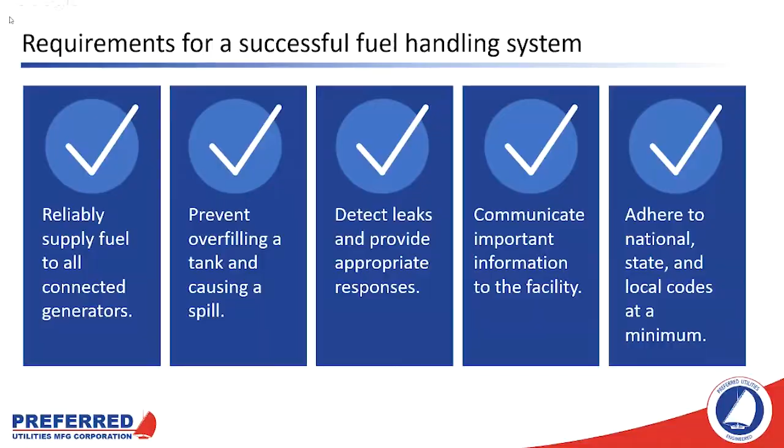So before we start designing the fuel system, we need to know what we're up against. We need to find out, are the main tanks above ground or underground? What is the configuration of the main tanks? Are they horizontal, vertical, cylindrical, rectangular? Do the tanks need to be UL 142 or UL 2085 fire rated? And finally, what size are the main tanks?

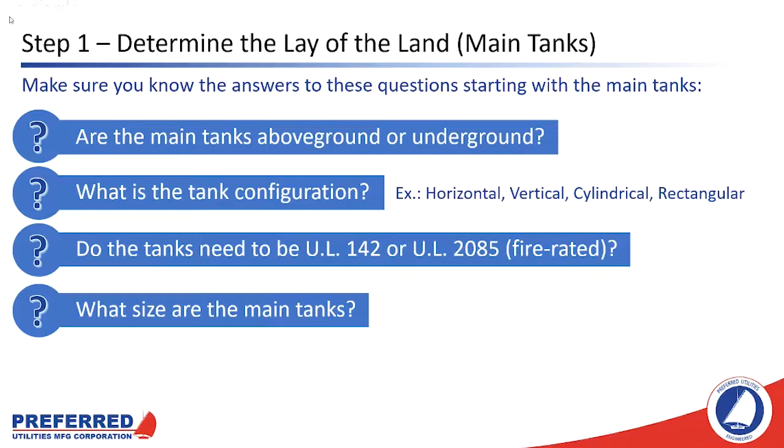This is a picture of a cylindrical underground storage tank. Underground storage tanks, or USTs, can hold a lot of fuel, more than an above ground tank. They don't take up any real estate because you can put parking spaces on top of them. Installation requires special licenses, so they're more involved to install. More agencies claim jurisdiction over underground tanks. I have a customer in Austin, Texas, and 4 different agencies claim they have jurisdiction over his underground tank. Preferred doesn't manufacture main tanks, but we can include them in our projects, and when we do, we'll make sure the main tank is coordinated with the rest of the fuel supply system.

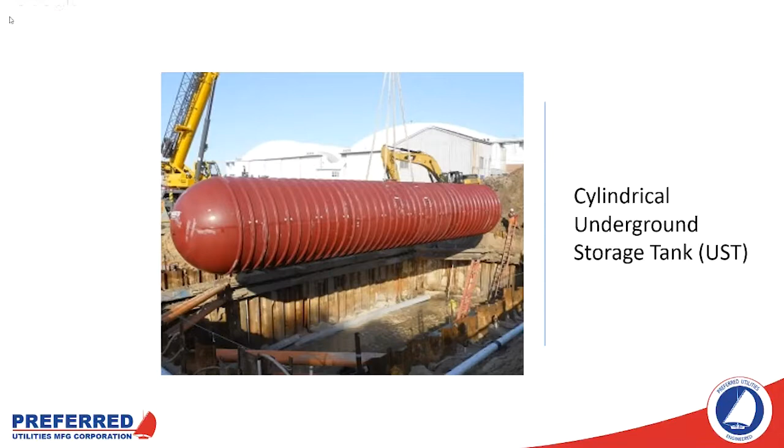Here's a picture of a rectangular above ground storage tank. Rectangular above ground tanks are easier and cheaper to install. Leak detection and virtually everything else is easier with an above ground tank than with an underground tank. They take up space and they're ugly, so architects usually favor underground tanks over above ground tanks. For most mechanical engineers, the choice of tanks has already been made by the time we get the project. It's usually the architects that are deciding where the tanks are going to go based on available space, and we have to live with their decisions.

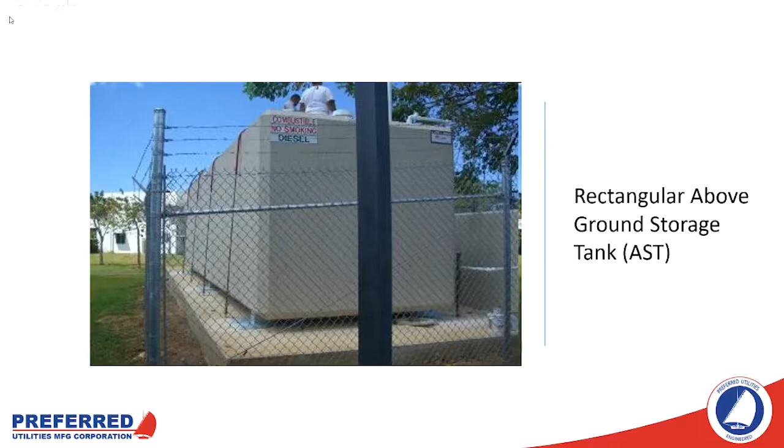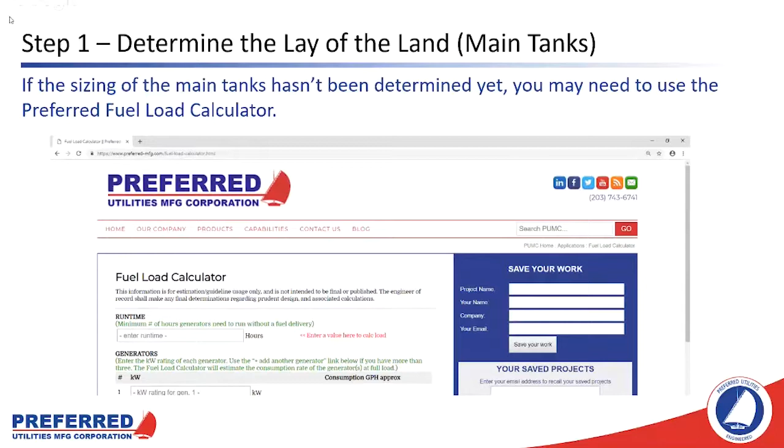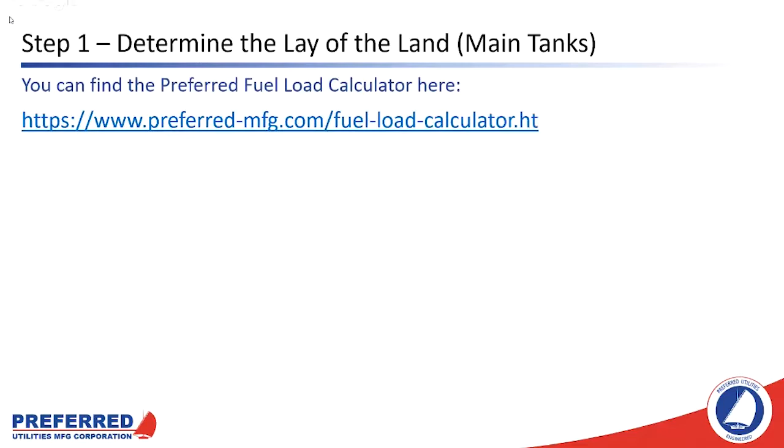If the size of the main tanks hasn't been determined yet, you may need to use the preferred fuel load calculator. In the fuel load calculator, you input your generator sizes, the required run hours, a couple of things like ullage and drop tube gap, and it'll calculate how many gallons of main tank storage you need. Florida recently passed a law that said nursing homes have to have 120 hours of fuel available to their generators, so this is getting used a lot in Florida. You can find the preferred fuel load calculator at this URL, or just Google preferred fuel load calculator and it'll be our first hit. This little web tool is so easy, it doesn't really require any explanation.

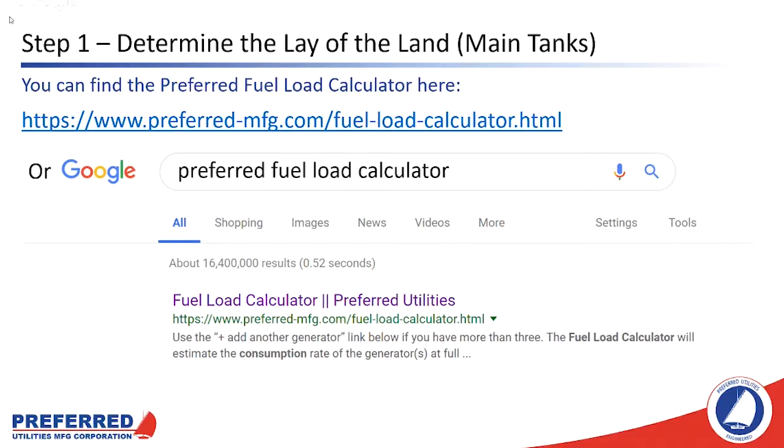So, more things we need to know about the system. Where are the generators located in relation to the main tanks in terms of vertical distance and pipe length? By now, you should know whether the generators are going to be on the ground floor, up a couple of floors, or on the roof. And we should know whether our main tanks are going to be above ground or below ground. We need to know if the generators are going to be supplied with belly tanks or if the fuel system supplier is going to need to provide day tanks. And finally, we're going to need to know the capacity of the generators.

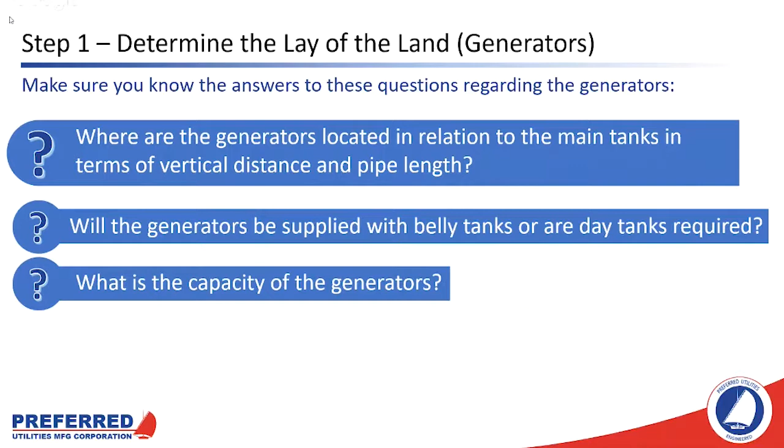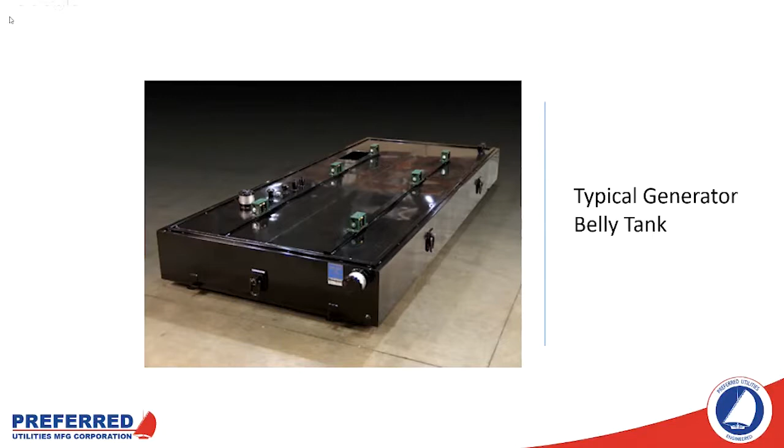Generators and belly tanks are typically sized for 2 to 4 hours of generator runtime, but some authorities having jurisdiction will put additional limits on the amount of fuel you can store in a day tank. Los Angeles, for example, limits day tanks to 60 gallons. So with a large generator, you're obviously not going to get 2 to 4 hours worth of runtime.

So the first step in supply pump sizing is determining the consumption of the generators. There's a real easy rule of thumb to help with this: for every 100 kilowatts of generator capacity, the engine will consume 7 gallons per hour of diesel fuel. In this example, it's an 800 kVA generator, so 800 kilowatts and 56 gallons per hour.

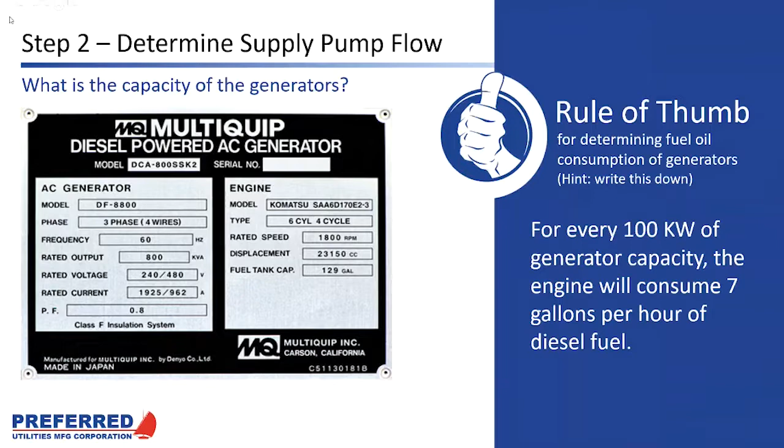So on top of that 56 gallons per hour, we're going to want to apply a generous safety factor, usually 3.0 to 4.0. The idea here is we want the supply pump to come on, quickly top off the day tank, and cycle off again. The pumps for most generator fueling systems are relatively small, so even with a large safety factor like this, it may only bump you up from a 3/4 horsepower to a 1 horsepower pump. It's not a huge increase in pump horsepower, cost, or electrical consumption.

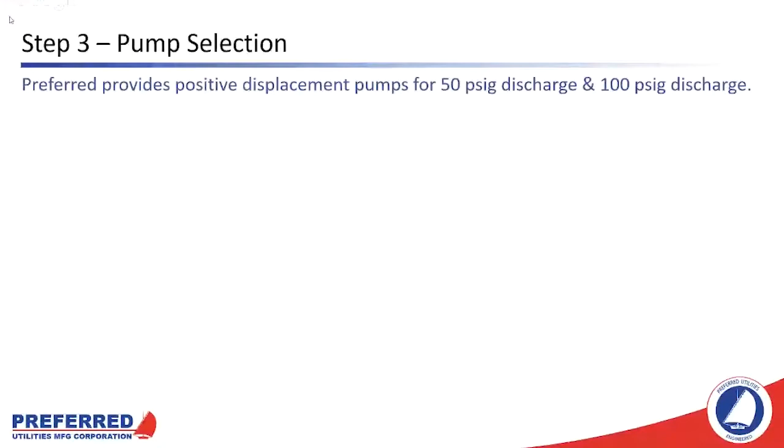Preferred provides positive displacement pumps for 50 psi discharge and 100 psi discharge. This table is from page 38 of Preferred Utilities Catalog 25. This catalog is available online. If you want a hard copy, email me and we'll make sure you get one.

These are the pumps used in Preferred's ATPS and SATPS pump sets. ATPS stands for Automatic Transfer Pump Set, which is the packaging we typically use with generator fueling systems. The SATPS is a semi-automatic transfer pump set. The pumps and piping are the same. The difference is the semi-automatic pump set is usually used for boiler systems, and the controls are much more stripped down compared to the ATPS. But as far as pump sizing, they're exactly the same.

We keep the parts for each of these pump sets in stock, so if we get a rush order, we can usually put together one of these pump sets pretty quickly, in a matter of a couple of weeks.

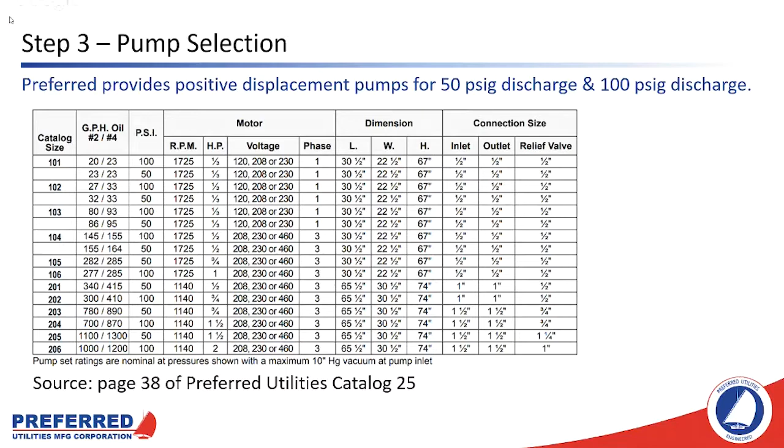If you're not sure what your pump discharge pressure will be, we have a handy web app called the Preferred Pump and Pipe Sizing web app. With this web app, you put in your configuration, whether the tank is below the pump, as in an underground storage tank, or above the pump in an above ground storage tank. You put in your line sizes, your valves, you pick a pump from a drop down menu, and this web app will tell you in real time what your pump discharge pressure is and what your pump suction pressure is.

As long as you're good, those numbers stay in the green. If you get marginal, those numbers will turn orange. And if you get into a situation where the pumps just aren't going to work, this will turn red. There's usually a note down there to give you an idea of what you're doing wrong.

Suction line sizing is critical with positive displacement pumps because they're limited to about 10 inches of vacuum. Discharge pressure is less critical because we have 50 or 100 psi to work with, which is a lot, but it still needs to be checked.

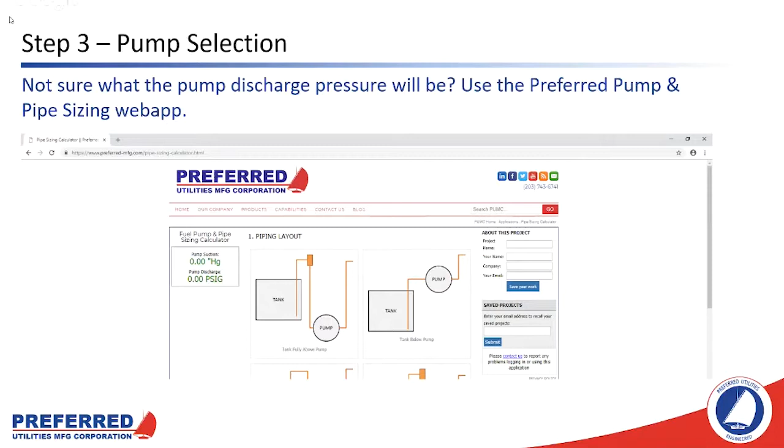You can find the Preferred Pump and Pipe Sizing web app at this URL, or just Google Preferred Sizing Calculator and it should be the first hit.

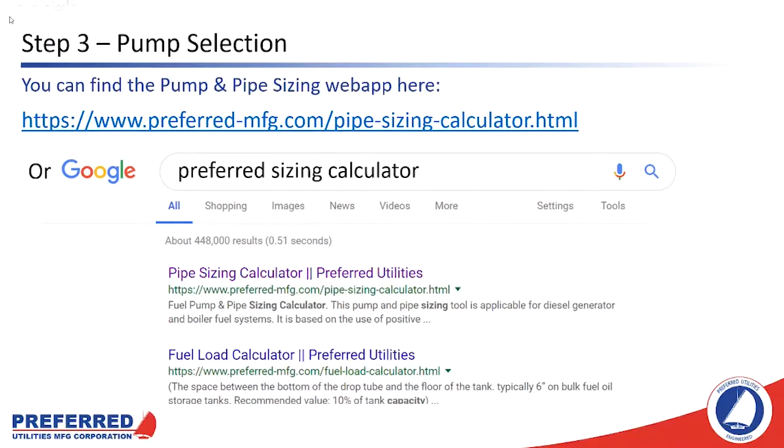In the pump and pipe sizing program, there's a pull-down menu where you select the pump based upon the sizing calculations we did before. Start with a 50 psi pump.

If you are in a situation where the day tanks are a long ways above the pumps, you may find that you need to go to a 100 psi pump.

In a properly designed fuel system, most of your inlet vacuum and discharge pressure will result from vertical lift, the hydrostatic pressure of the oil, not from piping losses. So we need to watch very carefully on underground tank systems, the diameter of the tanks, how deeply buried the tanks are, and then how high above grade level the pumps are going to be mounted, because we're up against a hard limit of about 20 inches of mercury on the suction side.

If you're in a high-rise application and you're certain you haven't undersized any of your piping or valves and your discharge pressure is still above 100 psi, that's probably an application for rotary screw pumps. Contact somebody at Preferred and we'll set you up with information on rotary screw pumps that can go to much higher discharge pressures.

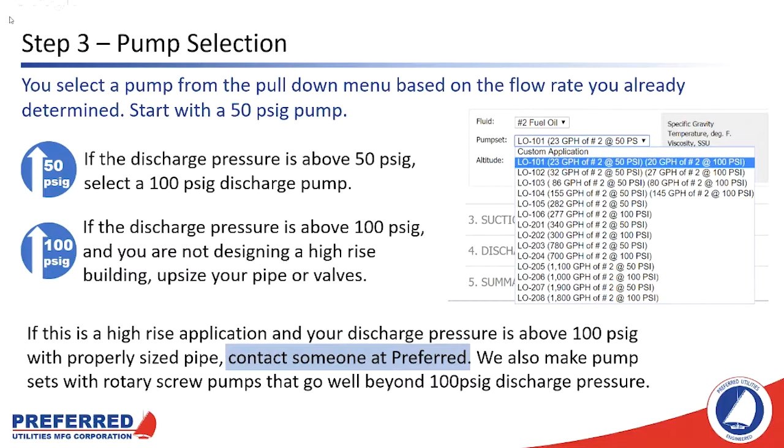There's a lot of text on this page, but it really boils down to a couple of things. We've already determined the flow rate in gallons per hour of our pumps, so we use the pump and pipe sizing program to make sure that our suction conditions are going to work for the positive displacement pumps, and make sure that our discharge conditions aren't going to overcome the maximum output of the pump as well.

Now that you know which pumps are the best selection, you can refer back to this chart for more information about that pump set, including pump RPM, pump horsepower, whether that pump motor is available in single phase or three phase, dimensions, and the connection sizes for that pump set.

This is on the Preferred website, and you'll also find AutoCAD drawings of these pump sets on the website. And if you email us, we can send you SolidWorks models of these pump sets as well.

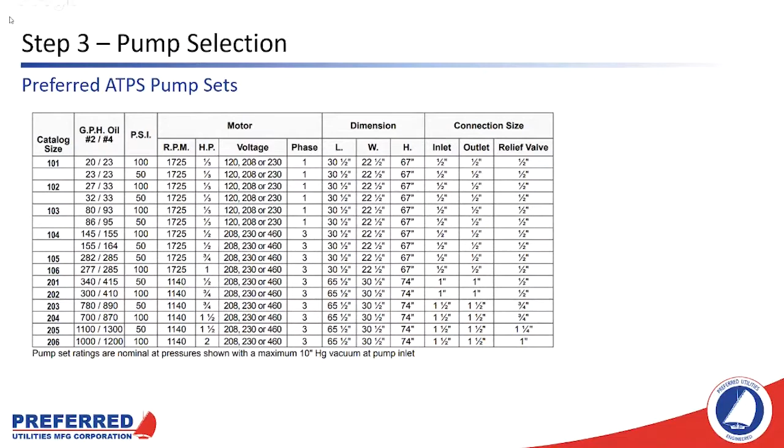For simplicity, we're not showing all the ball valves, pressure gauges, and other piping details that are part of the pump set. Note though, we're showing two Y strainers upstream of the pumps. That's the base model. These pump sets can also be provided with a duplex basket strainer that allows you to dump and clean one basket while you run oil through the other basket. It's a -D behind the part number of each of these pump sets.

There's an important item in the main tank: the foot valve. The foot valve is like a check valve that prevents oil from running backwards through this line and evacuating the oil pipe between the pump set and the foot valve. The number one problem with positive displacement pumps is that they can lose prime if this suction piping isn't done correctly.

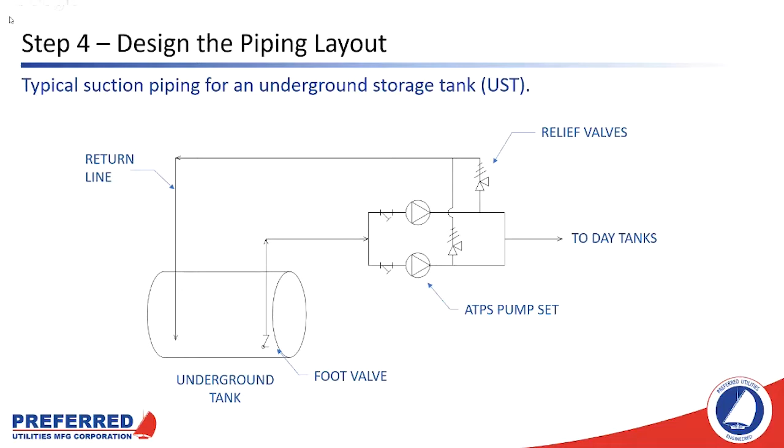Note that we show the supply and return pipes on opposite sides of the tank. This is good practice to keep the tank contents well mixed.

An anti-siphon valve is designed to stop the flow of oil if there is a major leak or a break in the line below the oil level in the main tank. The anti-siphon valve is similar to a spring check valve. The spring is sized so that the pumps can overcome the spring force, open the valve, and allow oil to flow. Siphonic action, or the difference between the hydrostatic pressures of the two columns of oil, will not open the valve, so there is no oil flow.

Anti-siphon valves are often required by local codes, and their CVs are relatively small. So if you're using the pump and pipe sizing program and you keep coming up with a lot of pressure drop in your suction line, you may need to oversize the anti-siphon valve.

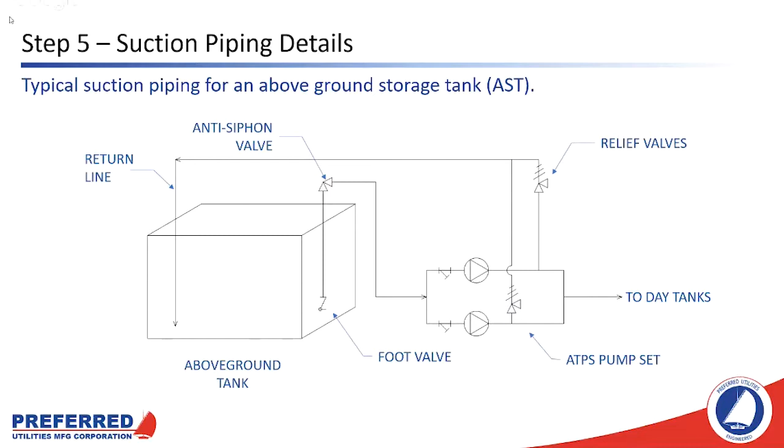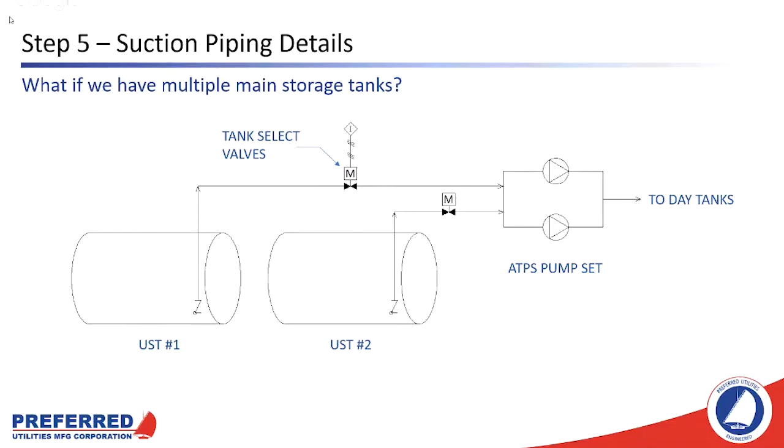Because the most common cause of overfilling a tank and causing a spill is human error, Preferred likes to automate the tank selector valves. The little I in the diamond stands for interlock, meaning the action of that valve is interlocked with the pump controls and the high-level switches in the main tanks.

So moving on to discharge piping. Discharge piping between the pump set and the day tank is very simple if there's just one day tank. The flow switch is there for the pump set lead lag function. If we energize a pump and don't prove flow, we will energize the alarm, shut off the lead pump, and energize the lag pump. If the lag pump doesn't prove flow either, we shut off both pumps and keep the alarm energized.

The controller in the ATPS pump set speaks Modbus, Ethernet, and BACnet, so the facility can know everything the pump set controller knows. Typically, the Modbus address registers that are mapped out to a building automation system include allowing the facility to know when the common alarm is energized, when we detect a leak, and when a pump is running. There's a lot more Modbus addresses than that, but those are the most common ones that are actually used by the building automation system.

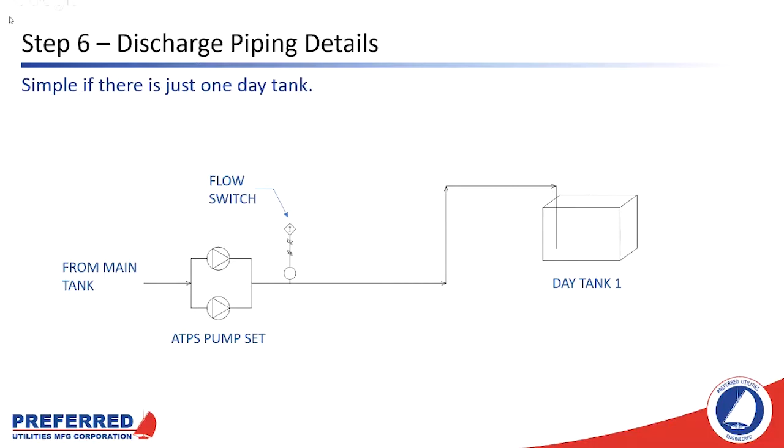If you're going to specify gravity return, ensure the routing of the return line will accommodate gravity return. Horizontal piping must be downward sloping, and there can't be any up and overs in the piping. Typically also, the return line size is one pipe size larger than the supply piping. You always want to be able to take fuel out of the day tank faster than you can put fuel into it.

New York City is now requiring you to provide your sizing calculations for gravity return lines to ensure that they will work. This is a new requirement we just started seeing about a year ago.

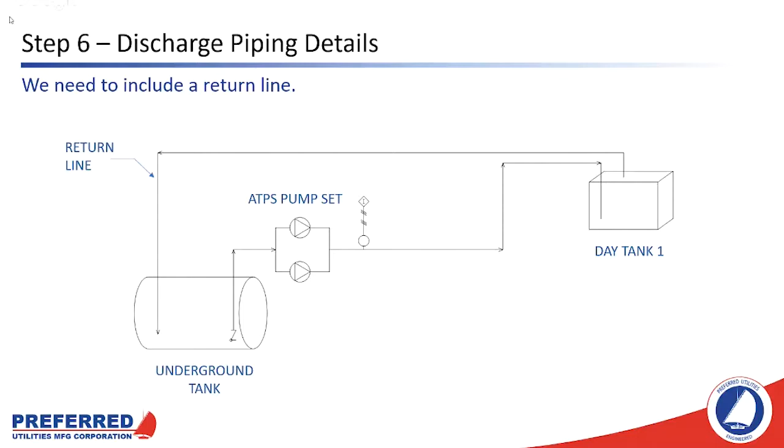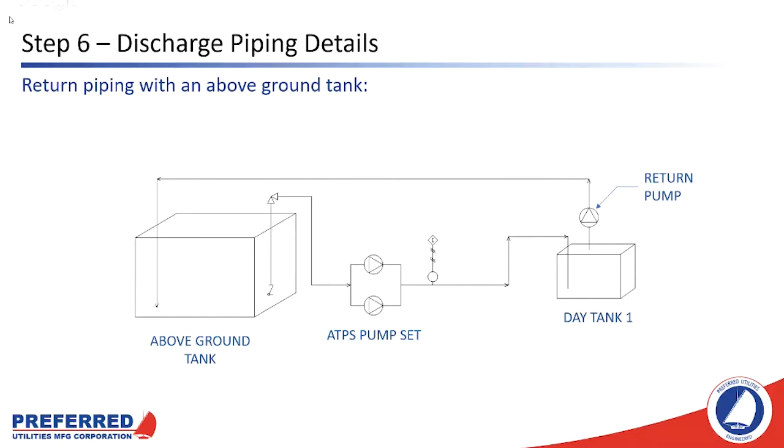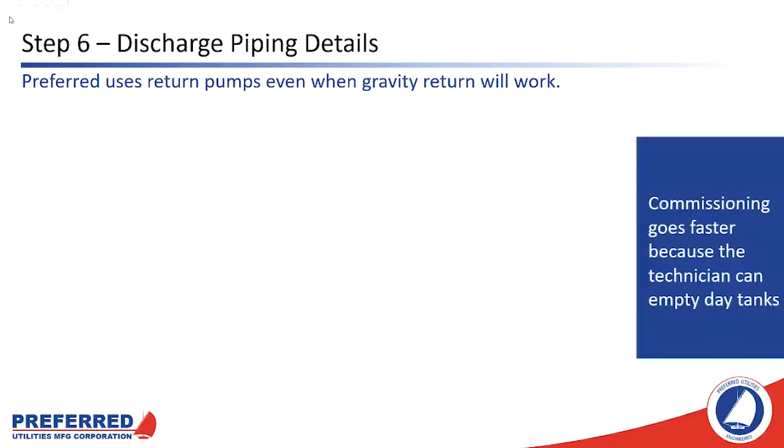Preferred uses return pumps even when gravity return will work for a few important reasons. Commissioning of the system goes faster because the technician can empty day tanks and fill them back up again and prove the operation of the system.

After the system is commissioned and turned over to the owner, the facility's operators can periodically test the fuel supply system by putting a return pump in hand, drawing the oil level down to the pump-on switch, and seeing that the supply pumps come on automatically and top off the day tank. This is a good thing to do weekly, monthly, and definitely if you think you're going to need to run your generators, like you're in Florida and there's a hurricane out in the Gulf.

When combined with main tank filtration, we'll often supply return pumps so that all the fuel in the system can be polished. Preferred filtration systems typically will pull out of the main tank and return to the main tank, but that doesn't clean up the fuel in the day tanks, and it's the day tank fuel that the engine's going to see first. So we'll often combine the operation of the filtration system with the operation of the pump set so that we can pull the oil out of the day tanks, make sure it gets cleaned, and then put it back into the day tanks with clean, polished oil.

And then finally, in hot climates, we'll sometimes use a return pump to do what we call level bouncing. The diesel engine uses the fuel for cooling, so the fuel that comes back to the day tanks is hot.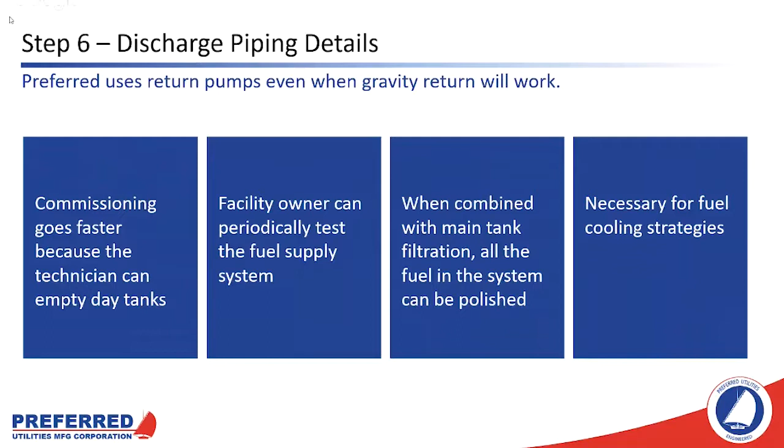Multiple day tanks are piped in parallel, just like multiple main tanks are piped. The supply pipe common to all the day tanks is called the supply header. The supply header can support virtually any number of day tanks.

The largest system that Preferred has done included 11 main tanks piped in parallel, and as of now, 28 generators all piped in parallel. That system had duplex supply headers and duplex return headers so there was no single point of failure that would keep fuel from getting to the engines.

When we have multiple day tanks in a system, we need to include fill valves so that only the day tank calling for fuel actually gets fuel.

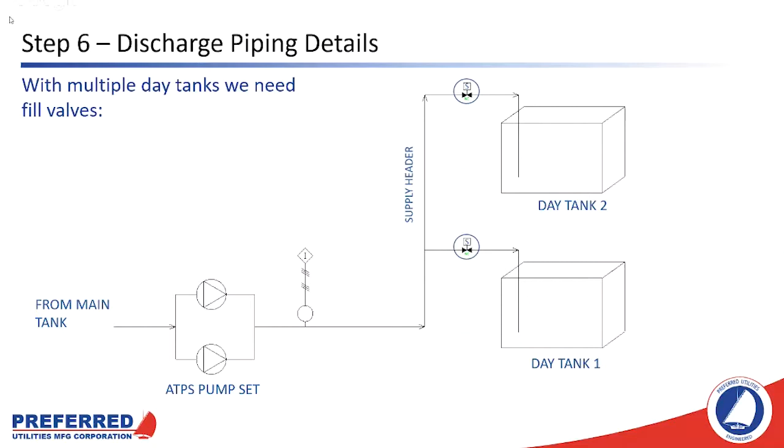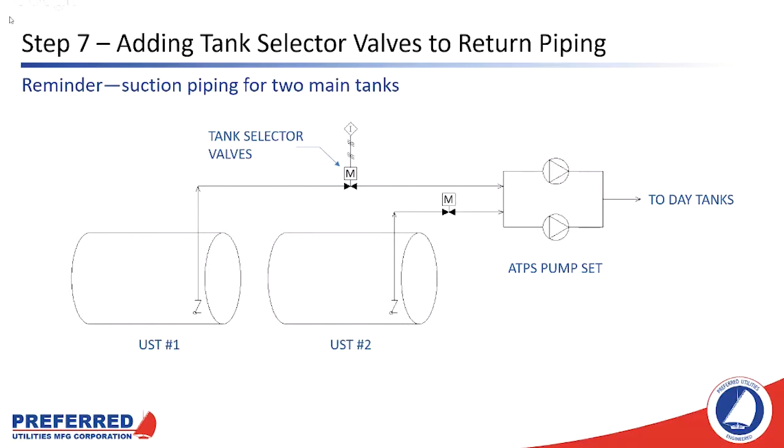Going back a couple of slides, this was our suction piping diagram for two main tanks. When we add return piping to the system, it gets quite a bit more complicated.

The return piping is headered just like the supply header, so that in theory any day tank can pull from any main tank. Some customers specify that flexibility. Other customers will only return to the tank they're drawing from. This is a safer alternative, because when you pull from one tank and return to another, you introduce the possibility of overfilling that tank.

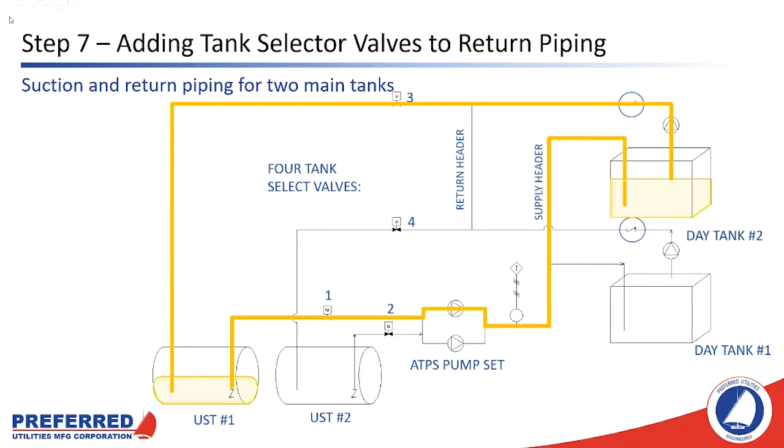If your customer is okay with drawing from one tank and returning to the same tank, we can simplify the piping quite a bit using a Preferred tank selector valve. They're shown here in both threaded and flanged versions. These are 6-port valves that include a common, a normally open, and a normally closed port for both the supply and return lines, so you never have to worry about your valves being lined up.

They're available with lever operators, as shown in these pictures, and we can also supply them with motorized valve operators with proof of open and proof of closure limit switches, if you want to automate this function.

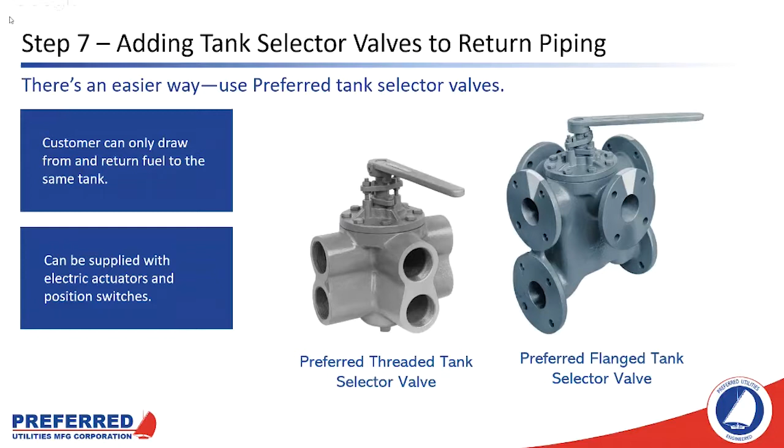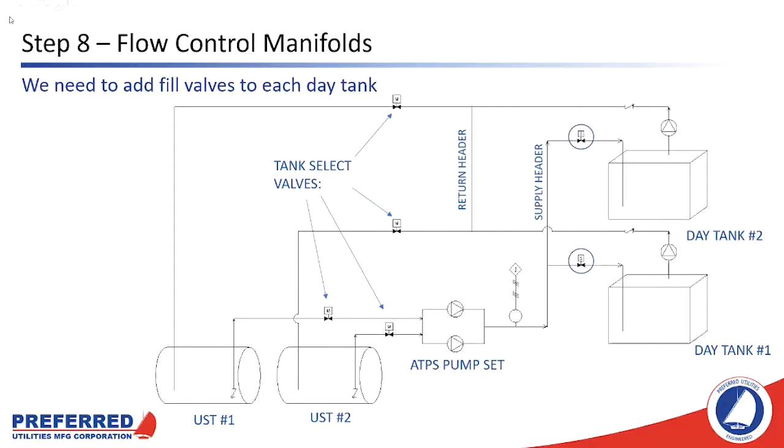Getting back to the fill valves, it's never as simple as what we've shown you already. In real life, the fill valve is part of a larger flow control manifold. The most basic flow control manifold consists of a solenoid shutoff valve with a 3-valve bypass around it. The 3-valve bypass allows operators to isolate a day tank, isolate the fill valve for maintenance or replacement, or bypass the fill valve to automatically fill a day tank.

Excuse me, you can bypass the automatic valve to manually fill a day tank. When Preferred does these systems, we interlock the supply pumps with the high level switches in the day tanks so that even when a facility operator has bypassed the fill valve, they cannot overfill the day tank.

There's a reason for everything we do at Preferred with these fuel handling systems. It's like my first marching band parent meeting before a big overnight bus trip. The band director told us some of these rules I'm going to go over are going to sound bizarre, but believe me, there's a reason for every one of them. Coming from a boiler background and now working on these fuel handling systems, I've found the Preferred engineers don't do anything by accident. There's a reason for everything they do.

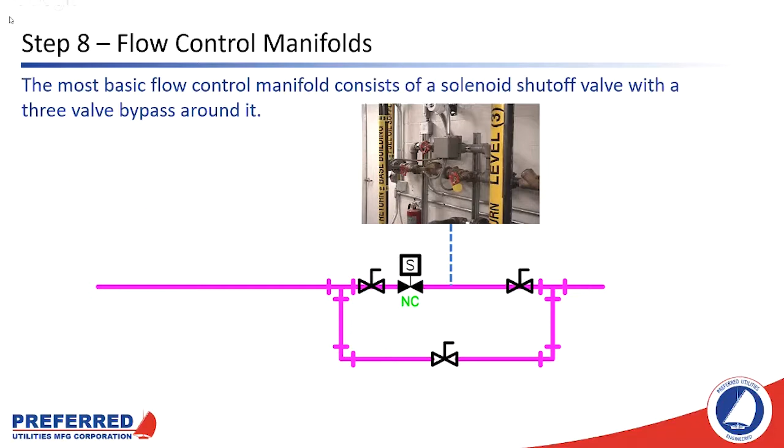A common thing to add to flow control manifolds is another solenoid shutoff valve. The logic for the second solenoid valve is usually driven by the leak detector in the day tank rupture basin. If the leak detector detects a leak, it sends power to the solenoid valve and that valve closes. It's usually independent of the other pump control logic. Some mission critical customers ask us to provide systems with different logic - they tell us to sound an alarm when a leak is detected in the day tank, but keep providing fuel to the generator.

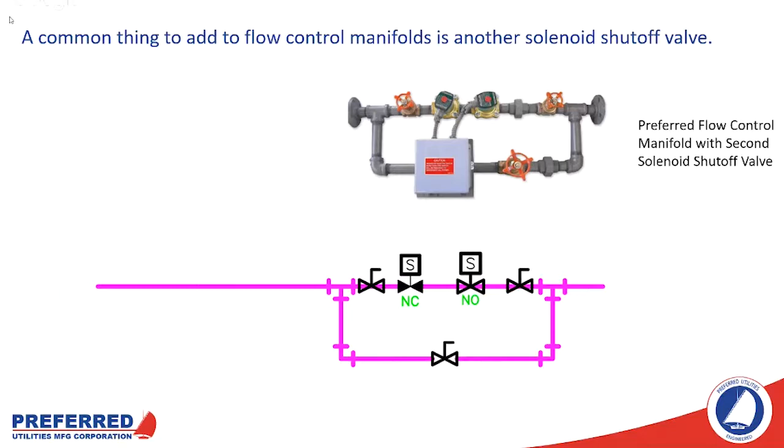We will often include an inlet strainer in the flow control manifold. This is to keep chunks of oil from going through the line that could potentially foul the solenoid valve and keep it from fully closing. There are higher quality filters between the day tank and the diesel engine - this strainer is mainly to keep chunks out of the solenoid valves and out of the day tank.

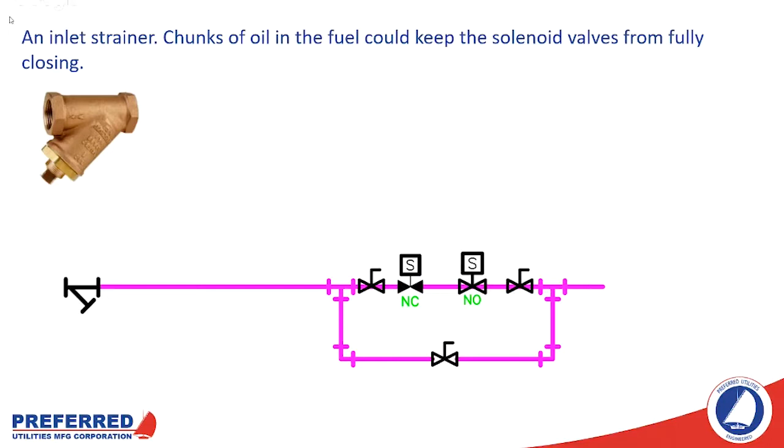We will often provide a flow switch in the flow control manifold. If we prove oil flow out of the supply pump but no flow is detected at the day tank, alarms should sound and people should start running. In this scenario where flow is proven at the pump set and fill valves are energized but no flow is proven at the day tank, it means one of three things: someone closed one of the hand valves so the day tank isn't going to get fuel, a solenoid valve didn't open because it burned up the coil, blew a fuse, or any of a million reasons why a solenoid valve will quit working, or there could be a massive break in the supply piping between the two flow switches and fuel isn't getting to the day tank, it's getting poured onto the ground.

These are all situations where we want to sound the alarm and get a facility person out to investigate. This is also why we say to have 2 to 4 hours worth of fuel in your day tanks. If your generators are commanded to run and there's a problem with your fuel delivery system, having 2 hours worth of fuel right there at the generator day tank gives you time to correct whatever problem is going on with the fuel supply system.

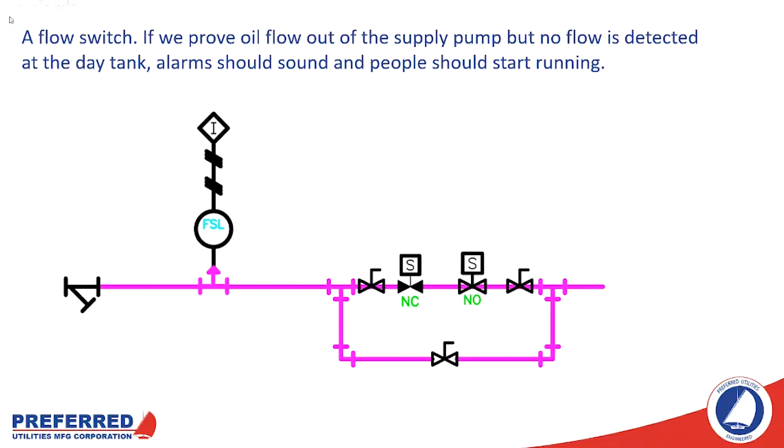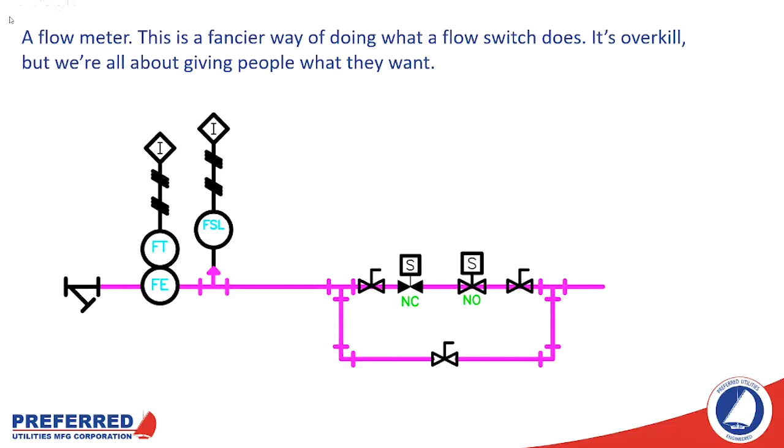Sometimes we'll put a flow meter in the flow control manifold. It basically does the same operation as the flow switch, and we don't recommend it, but it's specified sometimes.

A sight flow indicator can be very handy in the flow control manifold. When we put oil into a tank, we run the pipe all the way down to within 6 to 8 inches of the bottom of the tank. We do this to prevent splashing or foaming of the oil. Foaming can make float switches work poorly, and if we have a level sensor inside the tank, foaming or waves on top can interfere with it. So there'll usually be a pipe that goes down to within a few inches of the bottom of the tank. Because of that pipe, you're not going to be able to hear oil splashing into the day tank, so it's nice to have one of these sight flow indicators so you can actually see the oil getting to the day tank.

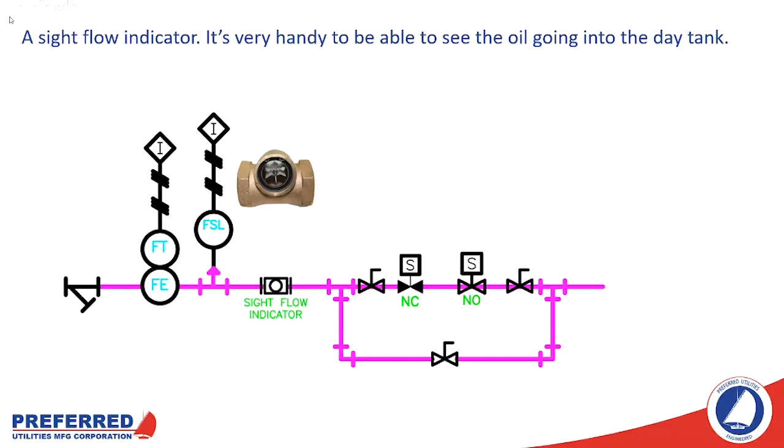Some of our higher end customers will specify motorized shutoff valves instead of solenoid shutoff valves. Motorized valves are much less likely to leak by, they're more reliable, and they can be supplied with proof of open and proof of closure switches for our really paranoid customers like data centers. If money was no object, all of our day tanks would be provided with motorized fill valves, but they are very expensive compared to solenoid valves. But we're only supplying fuel to generators powering server farms, operating rooms, respirators, emergency lighting.

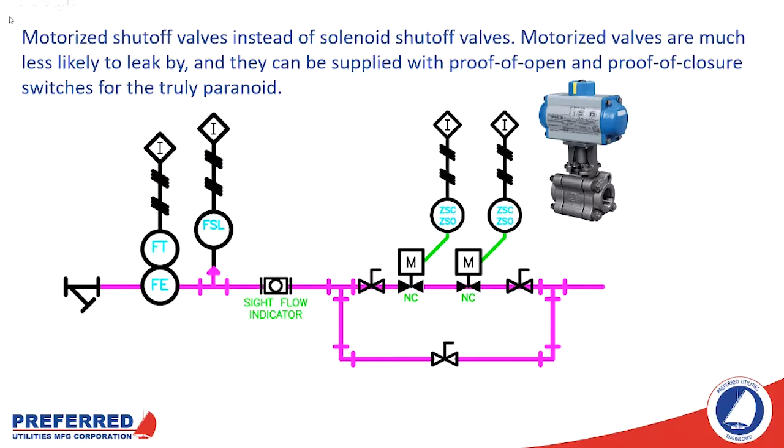So... Josh, call 1603, please. Sorry, we won't get any more pages.

Okay, so going back to the fuel control system, we've drawn the diagrams now. The next thing we're going to do is explain how the pump controls work, in a typical sequence.

When the engine draws the fuel level down to 50%, that's the pump-on level, the lead supply pump will come on, the fill valve will open, and it'll top off the tank back again to the 80% level.

This is one of the reasons why we tell you to put a fairly high safety factor on your supply pump sizing, because you want this topping off of the tank to go fairly quickly. There's a job in Florida right now where the engineer sized the supply pumps for the generator consumption, put about a 25% safety factor on the supply pump side, and then found that the belly tank was a 2,500 gallon tank and takes 16 hours to fill from 50% to 80%. So the safety factor is not large enough, and when the generator is running, the supply pump runs virtually all the time. We don't want the supply pumps to see a duty cycle more than about 25%. So that's why you'll see that safety factor of 3.0 to 4.0.

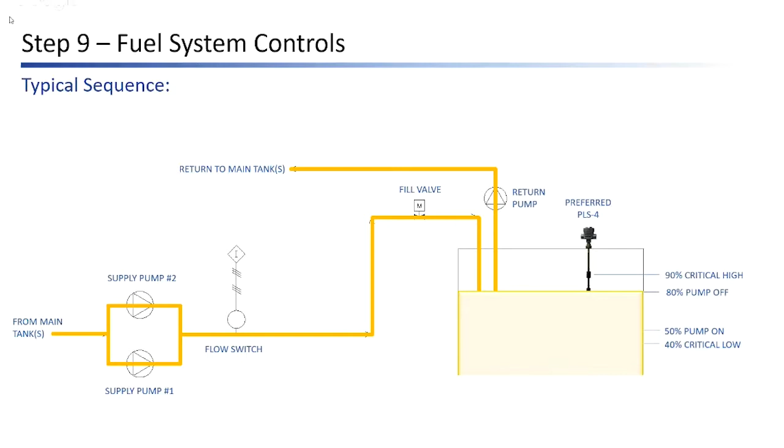There are a few variations on that basic control strategy. Sometimes that 4-position float switch, which we call a PLS4, can be supplied with 5 or 6 float switches. The additional switches can be an additional high-level switch, an additional low-level switch, or an emergency low-level switch that will turn off the generator if the level gets too low for the engine to suck fuel.

Sometimes when a tank is not very tall, like a very short belly tank, and there's no room to put that critical high switch in the tank, we'll put that critical high switch in the tank vent line. So if we start to push fuel up the vent, this switch goes off and we'll shut off the fill valve, shut off the supply pumps, and energize the return pump, just as if the switch was in the tank.

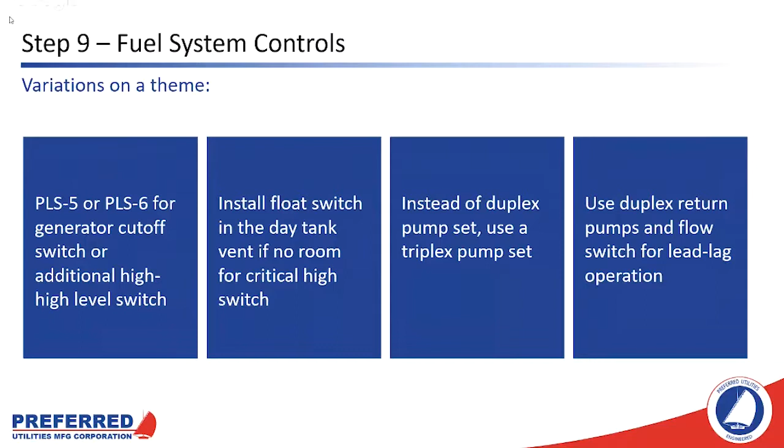Another common request is that instead of a duplex pump set, we'll supply a triplex pump set to give you 3 possible pumps and motors to run in an emergency. And sometimes instead of just one return pump, we'll supply duplex return pumps with a flow switch, and the lead-lag logic works just the same as the supply pumps.

Moving on to leak detection. Leak detection is required in tank interstitial spaces and in containment piping. Virtually all main storage tanks and day tanks now are required to be double wall with some sort of leak detection in the interstitial space.

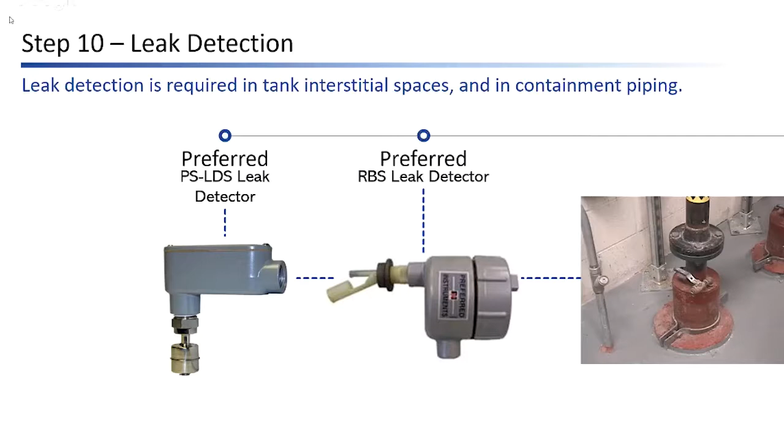What we've shown here is 2 of the float switches that Preferred uses. On the left is our PS LDS leak detector, and our RBS leak detector. The RBS stands for rupture basin switch because we typically install this in the rupture basin of a day tank. These are just float switches, very simple.

Preferred pump sets can be provided with optional leak detection in the rupture basin. There's a bunch of fittings in a pump set, which is a good place for a leak. There are also lots of unions that don't always get tightened up. So it's not a bad idea to put a float switch in that rupture basin to let you know when fuel's accumulating there.

A word about threaded piping: the pump sets at Preferred were pressure tested and vacuum tested at our factory prior to shipment. Then they bounced down the road several hundred miles on poorly maintained highways, and it's not uncommon for the piping to leak when it gets on site. So it needs to be tightened up, especially things like unions.

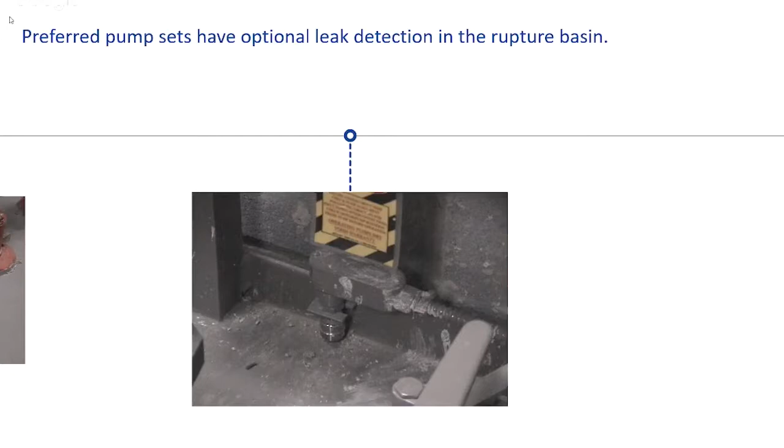The same is true of the terminal blocks in the control system. They were tight when they left the factory, but they can loosen up on the truck. When a wire sits in a terminal block that isn't tightened down all the way, it can make an intermittent contact that will drive a technician crazy, because sometimes it works and sometimes it doesn't. So a smart thing to do, before you even start setting up a new pump set or a new boiler, is tighten down all the terminal blocks and give them a pull test to make sure everything's tightly secured.

In some places, you may need to use a discriminating leak detector. What's shown here is a Preferred HDA2C. It has both an optical sensor and a conductivity sensor. When the optical sensor sees some sort of fluid, it looks at the conductivity sensor. If the fluid covering the sensor conducts electricity, it tells you you have a water leak. If it does not conduct electricity, it reports it as an oil leak. This is commonly used in the interstitial of underground main storage tanks. A water leak indicates a breach in the outer wall; an oil leak indicates a leak in the inner wall.

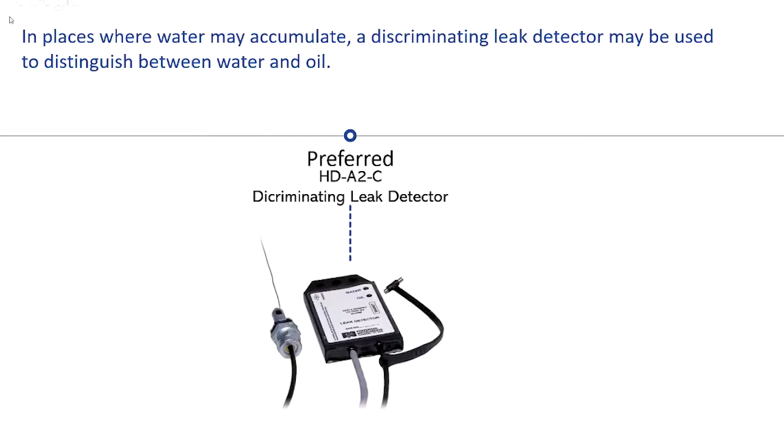If a leak is detected, in most cases the Preferred controls will sound the common alarm, de-energize supply pumps, and close fill valves. In some mission-critical facilities, the Preferred controls are programmed to sound the alarm, but pump controls stay in normal operating mode. The idea is these facilities are so critical that even in the event of an oil leak, they don't want to take fuel away from an emergency generator.

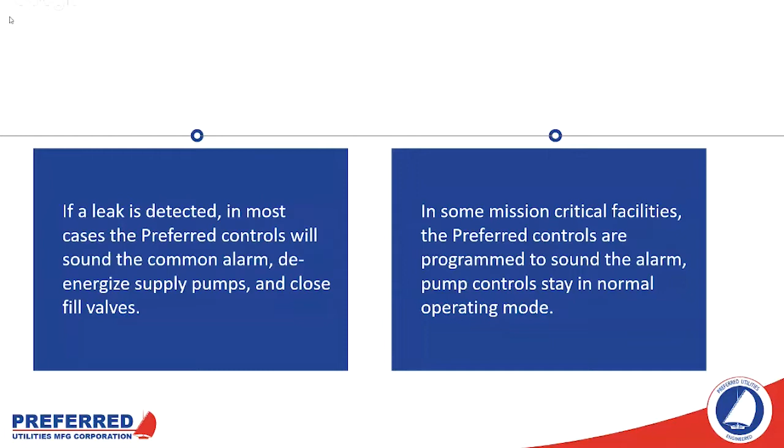Leak detectors can be wired into the tank gauge, or they can wire directly into the pump control system. With Preferred systems, the tank gauge and the pump controls communicate electronically, so it might be designed either way.

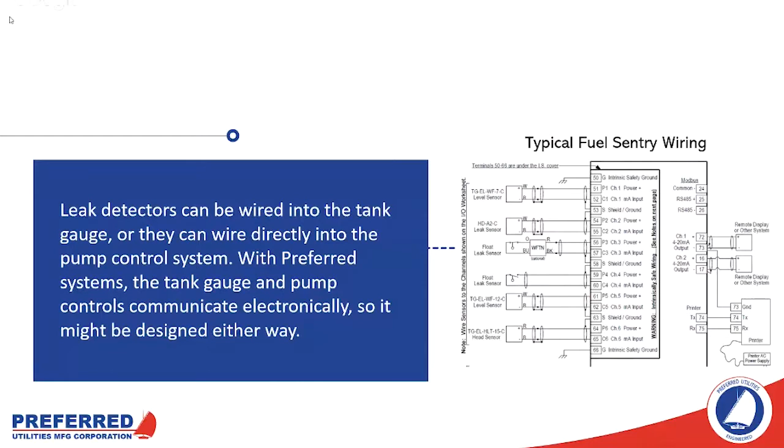So finally, tank gauging. All main tanks require electronic tank gauging. Some customers want tank gauges in their day tanks as well. In most jurisdictions, if the truck driver can't see the tank where he's putting fuel into, you're going to need a tank gauge with an overfill system that can alert the remote truck driver to when he's starting to overfill the tank.

In Danbury here, it's part of the inspection process. The fire marshal will come out and you order a truck at the same time, and you'll fill up the tank, and the fire marshal wants to see the alarm and the horns go off at 90%.

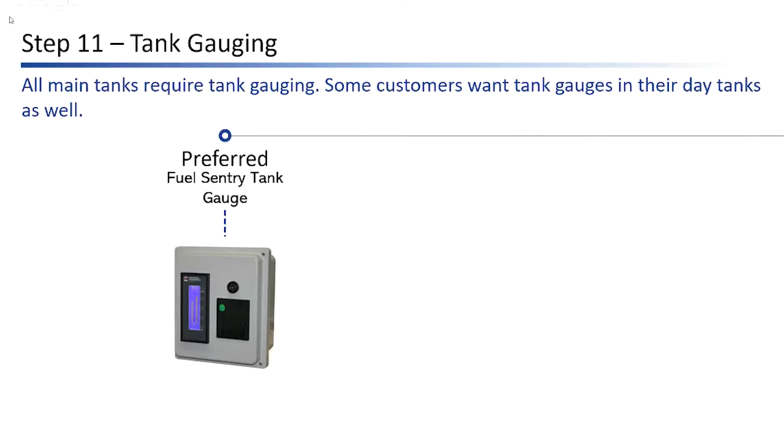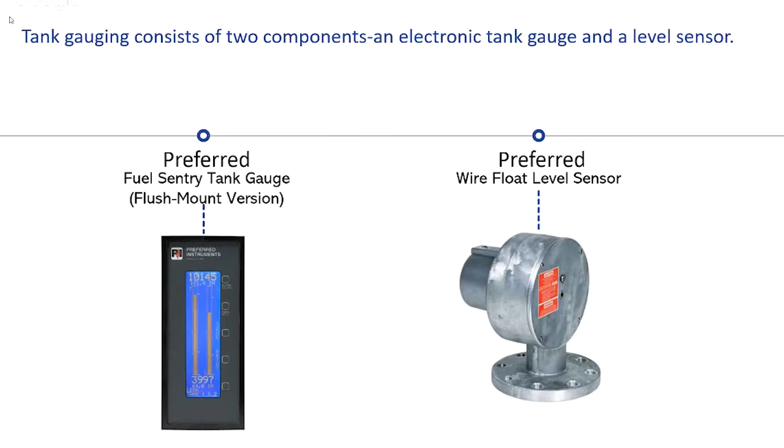Preferred offers 3 types of level sensors. The most common type is the wire float level sensor. We'll use this in virtually all of the main tank gauging we do. We also offer head level sensors and ultrasonic level sensors, more often used in day tanks, but they can be used in main tanks as well.

The head level sensor is basically a differential pressure transmitter. The high sensing line is a stainless steel torpedo-shaped device that hangs down at the bottom of the tank, as shown in the middle diagram here. Because it's a differential pressure transmitter, it needs a negative side, and that negative side runs through the cable, through the conduit, and then goes to what we call a barometric compensator, which is just a little device to protect the end of that tubing and try to keep it clean and bug-free.

The ultrasonic level sensor is basically a fish finder. It's mounted on the top of the tank, sends a signal down that bounces off of the oil in the tank and lets you know the distance between the sensor and the reflected oil. The ultrasonic level sensor comes with software where you can put in your maximum tank height, your mounting height, and a couple of other parameters, and it does a little bit of math to determine the level of the oil in the tank.

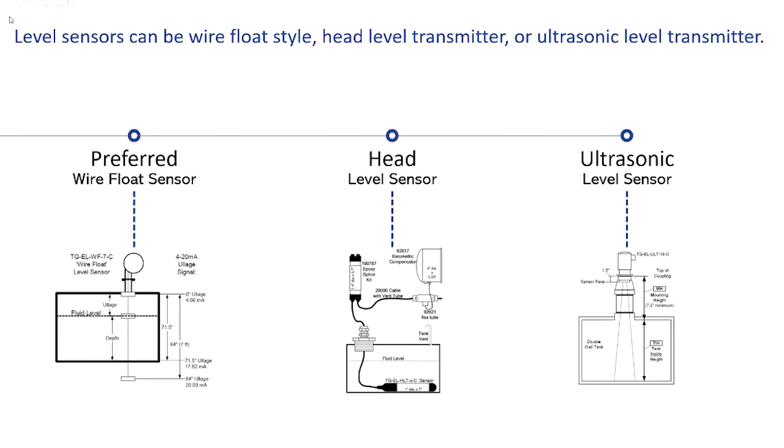If you have a tank with unusual geometry, the fuel sentry includes a 50-point stick chart, like a 50-point lookup table, where you can put in the actual gallons of the tank that correspond to each of the inches of oil in the tank.

So that was a basic introduction. For next time, we're going to cover fuel polishing. When is fuel polishing needed and what's the best way to go about it? We'll talk about high-rise fueling applications, applications that involve fuel oil heating in cold climates, and we'll expand on the oil cooling strategies we talked about a little earlier. We'll go through some real-life design examples, and then we'll look at a couple of case studies where things went horribly wrong and how that could have been prevented.